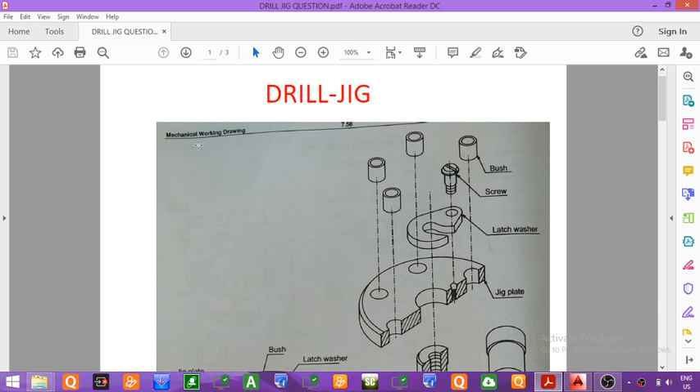Going to start with the detailed drawing or the disassembly of a drill jig. Now we will see what is a drill jig. Now this is the question of a drill jig. You can see this is the pictorial view of assembly of drill jig.

Now a jig is a device which is used to hold a workpiece as well as to guide the cutting tool to perform different operations on a workpiece. So here the drill jig is used to locate the workpiece or to hold the workpiece on which the drilling operation has to be performed, as well as to guide the drill in order to make the holes inside the workpiece. Now you can see these holes which are provided here on the jig plate.

This part is the jig plate. The holes are provided on the jig plate. So these holes will be used to guide the drill tool. So the drill tool will pass through these holes, and the workpiece which will be located below this plate, that is below the jig plate, on which we will perform the drilling operations. So basically drill jig is used to hold the workpiece in a proper location as well as to guide the drill tool in order to make the holes on the workpiece.

Now we will see the different parts of the drill jig assembly. So the different parts are: the first part at the bottom is the base plate. The second part, that is the vertical cylindrical part, here is the stem. Now the base plate and the stem are locked with each other using the locking screw or the cap screw. So this is the cap screw. So the cap screw will be used to lock the stem with the base.

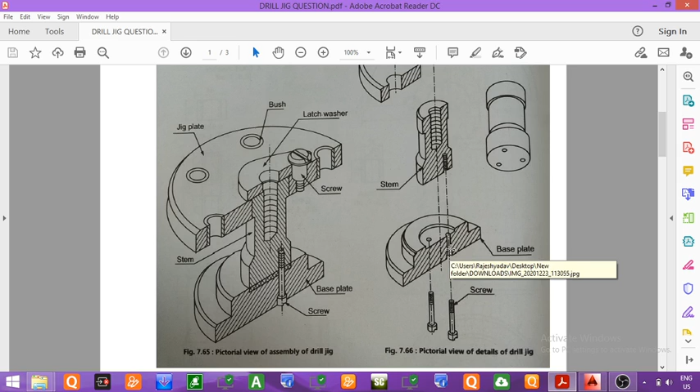Now you can see here the individual drawing of each and every part is given. So here there is a cap screw. This is the cap screw which is used to lock the stem with the base plate. This is the base plate. Now the base plate is having holes with threading present inside it. Now these holes are provided so that this cap screw can pass through them.

And finally, when the cap screw is inserted through this hole, the cap of the screw will rest at the bottom, whereas the threaded part will pass through this hole. Some part of the screw will go inside the stem. You can see threading is provided inside the hole which is present inside the stem. So some part of the screw will go inside the stem, and finally the stem will get locked with the base plate.

Now these holes are present in three quantity or three numbers. You can see at the bottom, this is the entire view, whereas the sectional front view, we have taken half section. So this is the sectional front view of the stem, whereas this is the entire view of the part. Now this part is having three holes at the bottom.

You can see first hole, second hole, and third hole. These three holes are provided at the bottom of the stem, and similar holes will be provided at the top portion of the base plate, inside this slot. This slot will also have three holes, and the diameter of this hole and that hole will be the same, so that when we insert these screws through the base plate, they will get locked by passing through the base plate and into the stem. So they will lock the stem with the base plate.

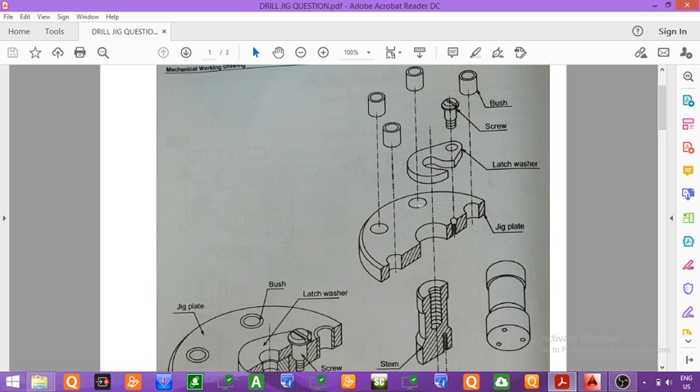Now this is the jig plate. The jig plate is having holes inside it. You can see first hole, second hole, third hole, and fourth hole. The total number of holes present is 6, but since we have taken the half section, here we can see only 4 holes. There is also a hole at the center, provided so that we can insert the stem through this hole. Inside these holes we will insert the bushes. These are the bushes, which will be inserted inside the holes present inside the jig plate.

After inserting this stem through this hole, we will lock the stem with the jig plate using the latch washer. This washer is used to lock the jig plate as well as the stem. When this part gets inserted here, we will lock this part and this part using the screw and the latch washer, as well as a nut that is provided. After inserting the stud here, we will lock the latch washer, the jig plate and the stem.

So these were the assembly and detailed drawings. This is the detailed drawing of each and every part, or the detailed 3D view of each and every part of the drill jig, and this was the assembled 3D view of each and every part.

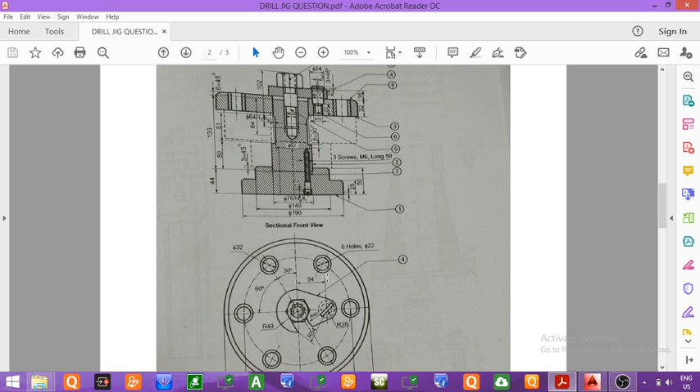Now we will see the assembly drawing of the drill jig. You can see here the top view. If you see the top view, it is mostly circles. Majority of the figures in the top view are in the form of circles, so we can conclude that these parts shown in the front view are cylindrical in nature. Each and every part will be cylindrical, that is, if we observe these parts from the top view, they will be observed as circles.

Now you can see the total number of holes, that is these holes which were present inside the jig plate, is equal to 6. You can count here 1, 2, 3, 4, 5 and 6. So the total number of holes present inside the jig plate is equal to 6.

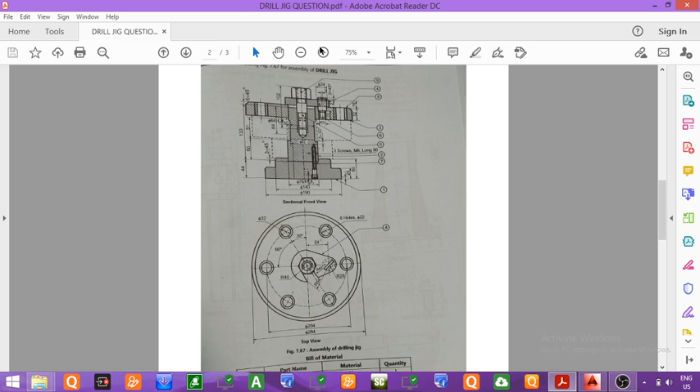Now we will see here the assembly diagram of the drill jig. You can see part number 1. Here the part list is given. Part number 1 is the base plate, material is cast iron, quantity is 1. Part number 2 is the locating peg, material is mild steel, quantity is 1. So here different parts used in the assembly, along with their material and quantity, are given.

You can see here the bushes which were present inside the jig plate, or which will be inserted inside the hole of the jig plate, are made up of CS, and the quantity is 6. So we can conclude that 6 holes are present inside the jig plate, and there will be 6 bushes which will be inserted inside this jig plate.

This is the top view of the latch washer. This is the top view of the bushes, the circles representing the top view of the holes as well as the bush. Then this is the top view of the latch washer. Then this is the top view of the hexagonal nut which will be used to lock the stem with the jig plate. Then this is the top view of the screw, the locking screw. The circles are nothing but the top view of the jig plate.

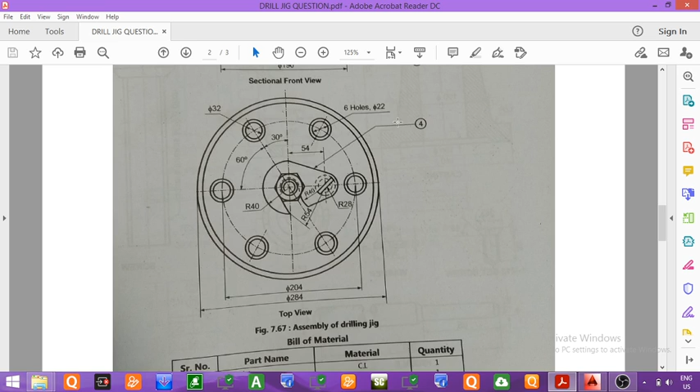Now we will here see the front view. So part number 1, part number 2 - each and every part has been named. You have to study the question carefully.

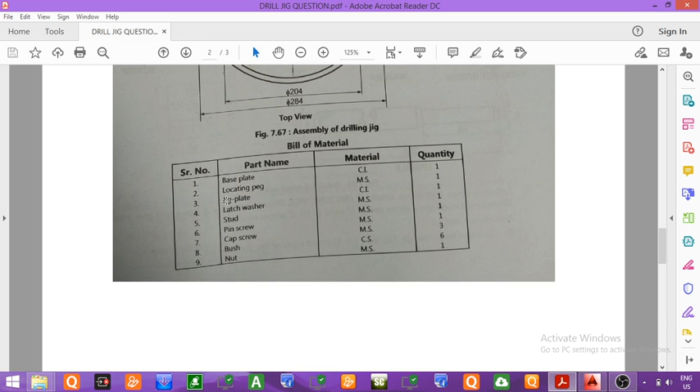In the exam, they may ask you to draw the front view and top view of a few selected parts, such as the base plate, locating peg, or jig plate. First, we have to locate these parts appropriately in the drawing. You can see the arrow pointing to the first part, and that first part is the base plate.

Here the entire sectional front view of the drill jig has been given. Now we have to disassemble each part, separate them, and draw the sectional front view and top view of each part with dimensions. So we will draw the first part, the base plate, whose quantity is 1.

In order to draw the base plate, first we need to identify its dimensions. You can see the outer diameter of this base plate is equal to 190. Since the dimension is given as diameter, this indicates that the part is cylindrical in nature, so the outer or largest diameter is equal to 190.

The diameter of this part from here to here is equal to 140. Whereas the diameter of the hole provided inside the base plate, where the stem will be inserted, is equal to 76. So the three diameters identified are: the largest diameter of the base equal to 190mm, the diameter of the upper part equal to 140mm, and the diameter of the hole for the stem equal to 76mm.

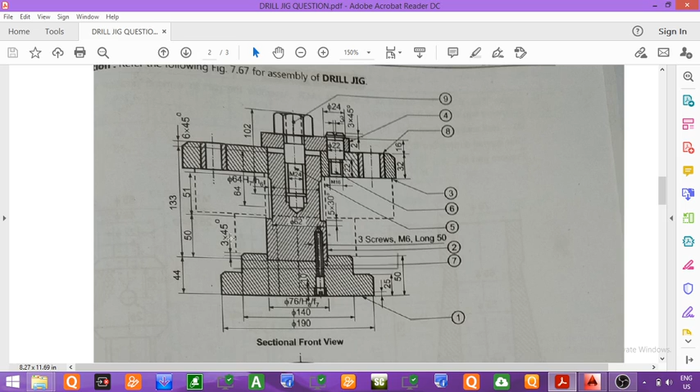Now you can see that at these corners, the sharp edges have been removed by using a fillet or chamfer. Chamfers are provided in order to eliminate sharp corners or sharp edges. The dimension of this chamfer is given as 3 into 45 degrees, meaning the height of the chamfer is 3 and the inclination of the chamfer line is 45 degrees.

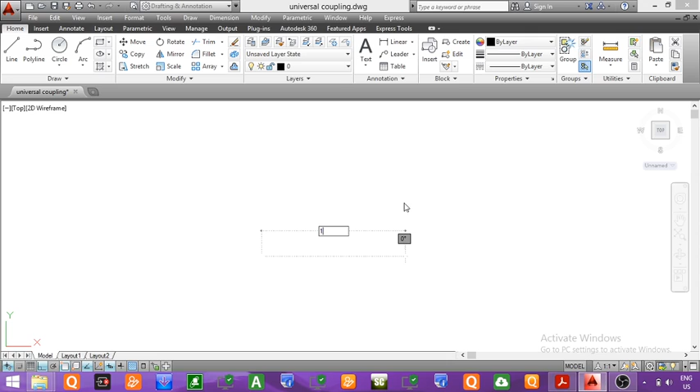Now we will draw the front view and top view of this base plate. First we will draw a line. The outer diameter given in the question, the major diameter, was equal to 190mm. So first we will draw a line of length 190mm. I am drawing this line, which will be of length 190mm.

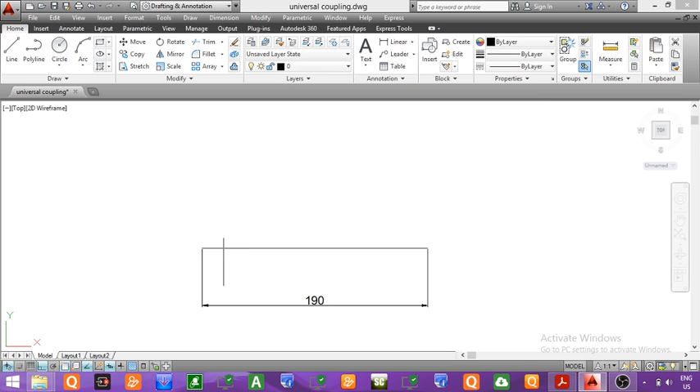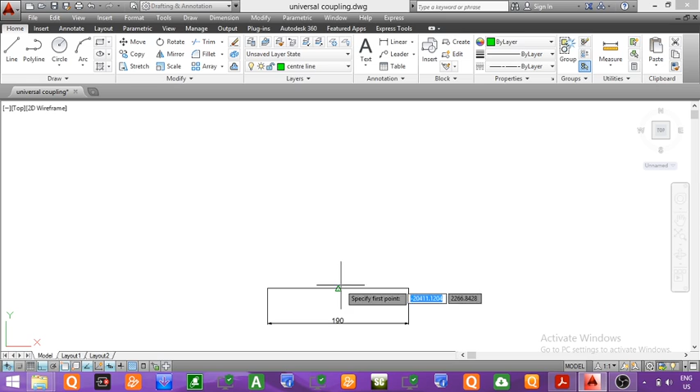So we have drawn first a line of length 190 mm. This line represents the base, which is equal to diameter 190 mm. Now in the next step we will mark the center of this part. So first we will draw the center line. The center line will be passing through the center of this line. So this is the center midpoint. You can see this is the midpoint. Now from this midpoint I will draw the vertical center line.

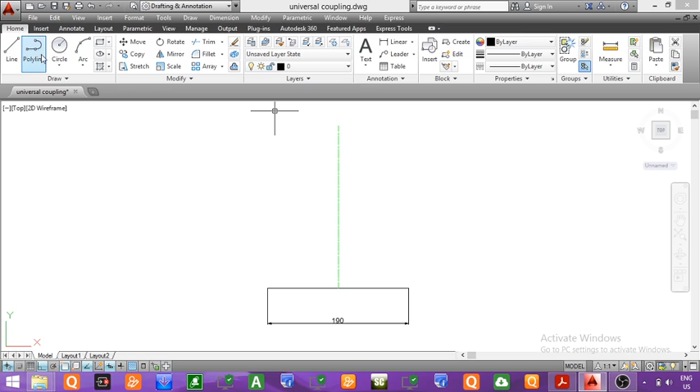Now in the next step we have to draw this vertical line. This vertical line will be of length 25 mm. You can see the length is 25 mm. So now we will draw a straight vertical line from the left end as well as from the right end, which will be of length 25 mm. So from this point we will draw a vertical line of length 25 mm. Similarly from the right hand side we will draw a vertical line of length 25 mm.

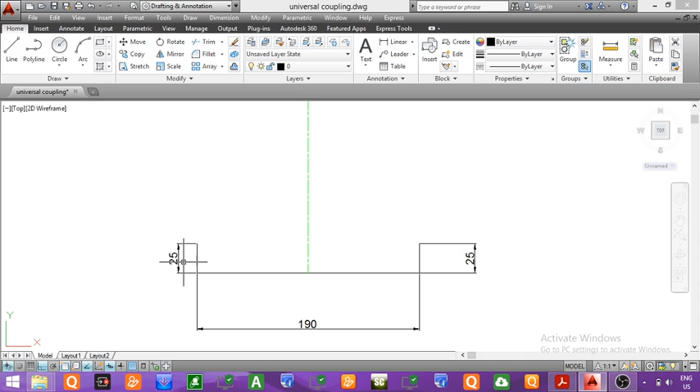Now we will give the dimension. So you can see the length is equal to 25. Again here the length will be equal to 25 mm. So you can see the length of the line on the left hand side as well as on the right hand side is equal to 25 mm.

Now in the next step we have to draw this line. Till now we have drawn the vertical line of length 25 mm. Now we have to draw this horizontal line, and we have to find the dimension of this horizontal line. Now how can we find the dimension? You can see the total outer diameter is equal to 190, whereas the diameter of this portion from this point to this point is equal to 140. So the difference of 190 and 140 will be equal to 50 mm. So now this 50 has to be divided by 2 because we have the line on the left hand side and on the right hand side also.

So first we will take the difference of this outer diameter 190 and the diameter of the portion from here to here, which is equal to 140. So the difference will be equal to 50 mm. Now we will divide this 50 mm by 2, so we will get 25 mm. So the length of this line will be equal to 25 mm. So now we will draw a line of length 25 mm from here. Similarly, again we will draw a line of length 25 mm from this point.

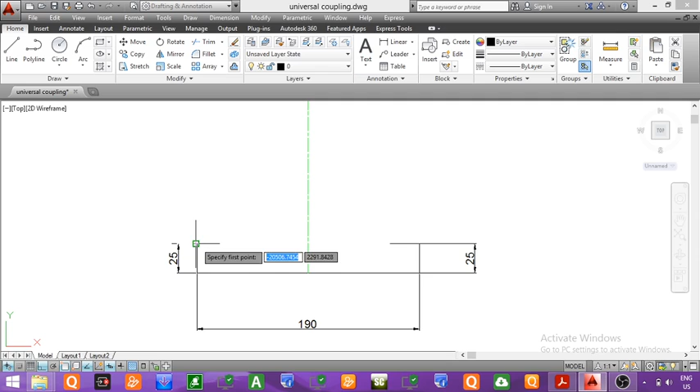Now I will give the dimension here. So you can see the dimension is 25 mm. So you have to draw a line of length 25 mm both on the left hand side as well as on the right hand side. Now we will give the dimension here. So you can see this is 25 and this is 25.

Now in the next step we have to draw this vertical line. This vertical line will be of height 25 mm. The total height is 50 mm and this is also 25 mm. So the difference will be equal to 50 minus 25, that is 25. So this line will be of height 25 mm. So now we will draw a vertical line of 25 mm from this point, 25 mm on the left hand side and 25 mm on the right hand side.

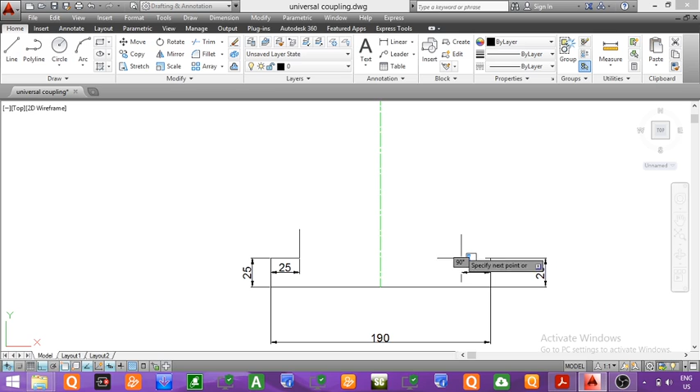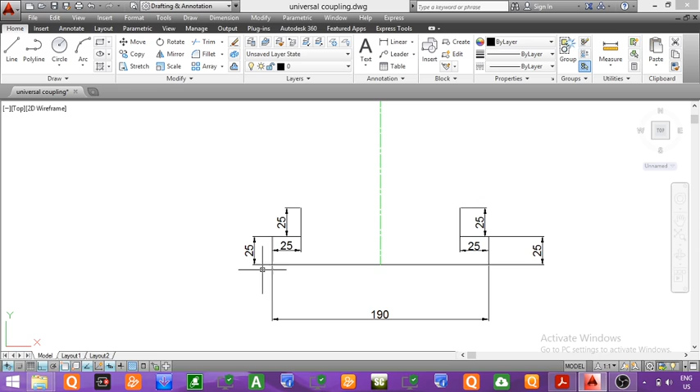So you can see we have drawn a line of 25 mm on the left hand side as well as the right hand side. Now we will give the dimension. So this is 25. You can see we have drawn a line of height 25 mm, and from this point we will again draw a line of height 25 mm. So first we have drawn a vertical line of 25 mm, then a horizontal line of length 25 mm, and then finally again a vertical line of height 25 mm. Now I am deleting this dimension. We can give it later on.

Now in the next step, we have to draw this horizontal line from here to here. So we have to find the dimension of this horizontal line which is on the left hand side, as well as the same horizontal line has to be drawn on the right hand side also. Now in order to find the dimension of this horizontal line, we have to look at the dimensions first. The total dimension from here to here is equal to 140 mm, whereas the dimension of the hole which is present inside the base plate at the top, that is this hole, is equal to 76 mm.

So the diameter from here to here is equal to 140 mm, whereas the diameter of this hole is equal to 76 mm. So we will first find the difference. The difference will be equal to 140 minus 76, that is equal to 64. Now we have to divide that 64 by 2. So 64 divided by 2 will be equal to 32. So the dimension of this line will be equal to 32, as well as the dimension of this line will be equal to 32 mm.

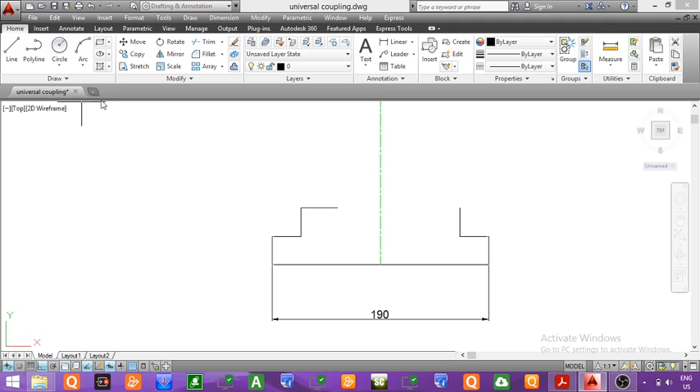So now we will draw two horizontal lines of length 32 mm both on left hand side as well as right hand side. 32. Again we will draw a line from this point which will be of dimension 32 mm. Now we will give the dimension. So this line is of length 32 mm. Again this line is of length 32 mm. So you can see we have drawn a line of length 32 mm both on left hand side and right hand side. Now we will draw the hole which is present here.

Now in order to draw the hole, we will find the dimension of the hole. The height of this hole will be equal to 6 mm. As said earlier, the height of the hole is found out by: the total height of the base plate is equal to 50, whereas the height from this line up till this point, that is where the hole begins, is equal to 44. So the difference will be equal to 50 minus 44, that is 6 mm. So the height of the hole which is present inside the base plate will be equal to 50 minus 44 equal to 6 mm.

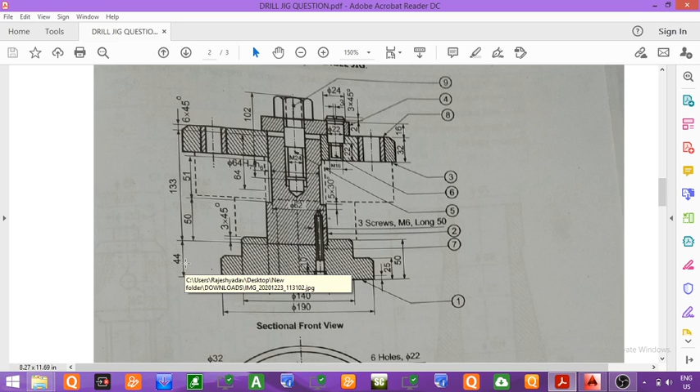So now we will mark the height of the hole which will be equal to 6 mm. You can see we are marking the height 6 mm. Again we will mark the height on the right hand side which will equal 6 mm. Now we will give the dimension so that you can understand. The height of this hole is equal to 6 mm. You can see the height of the hole is equal to 6 mm. Similarly, here also the dimension will be equal to 6 mm. So we have marked the hole which is of dimension 6 mm.

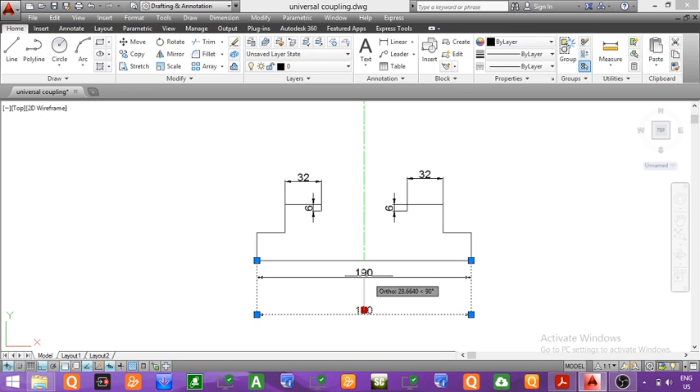Now I am deleting this dimension. We can give it later on. Finally, now we will join these 2 points to represent the hole. So we are joining the first point with the second point. So you can see we have completed some part of the front view of the base plate. Now if we want to give dimensions, we can give it later on.

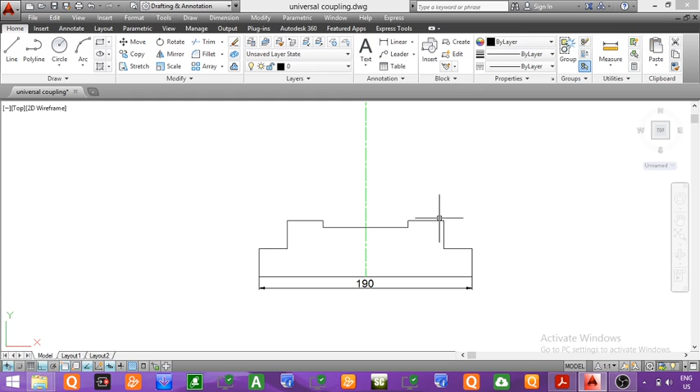Now in the next step, we have to show the chamfering which is done at this corner. See, these are the corners which are formed. Now we have to eliminate these corners, and these corners are eliminated by doing chamfering. So now we will provide the chamfering. In order to provide the chamfering, we have to first see the dimension of the chamfer. The dimension of the chamfer is given as 3 into 45. So now we will provide the chamfer. So we are providing the chamfer.

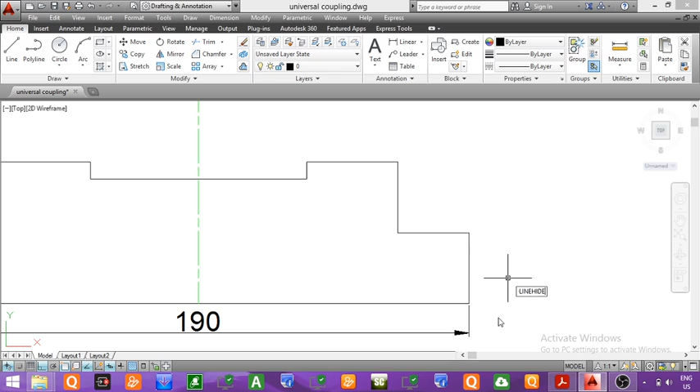So you can see we have provided this chamfer. Now this chamfer will have a vertical height equal to 3 mm and the angle will be equal to 45 degree. Now I will give you a dimension of this chamfer. The height of this chamfer will be equal to 3 mm. You can see the height, that is from this point to this point, the vertical height will be equal to 3 mm, whereas the angle of the chamfer will be equal to 45 degree.

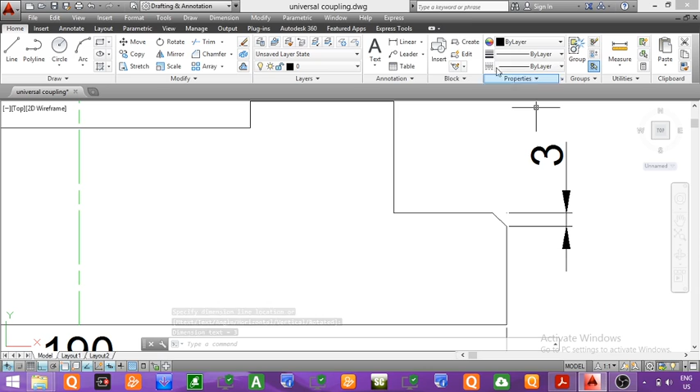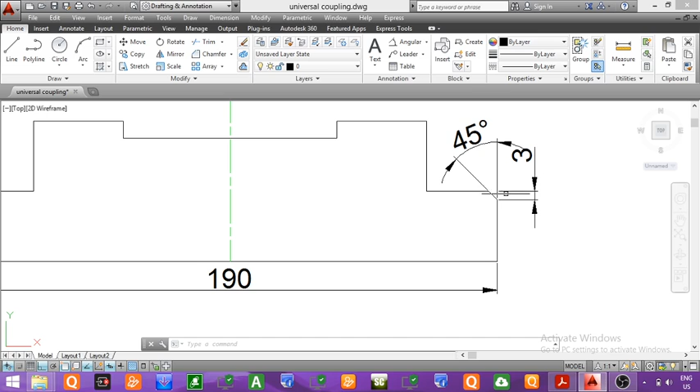Now I will show the angle also. Now you can see the angle is equal to 45 degree. So at this corner you have to draw a chamfer line or inclined line to show the chamfering, and this inclined line will be drawn at a vertical height of 3 mm and at an angle of 45 degree. So from the corner you have to mark a height of 3 mm in the vertical downward direction, and from this point you have to take an angle of 45 degree. So the chamfer will have a vertical height of 3 mm and a chamfer angle of 45 degree. Similarly, now we will show the chamfer here also.

So we have given a chamfer on the left hand side also. Similarly, we will do the chamfering on the top corner on the left hand side as well as the top corner on the right hand side. So again, we will select the first vertical line. Now we are providing a chamfer. So we have provided the chamfer here also at this corner, and now we will provide the chamfering at the right corner on the top side.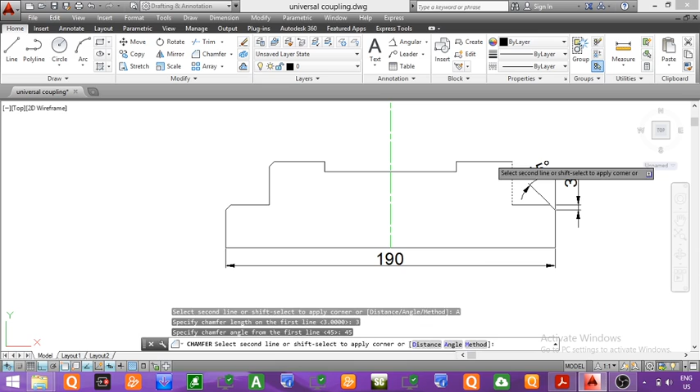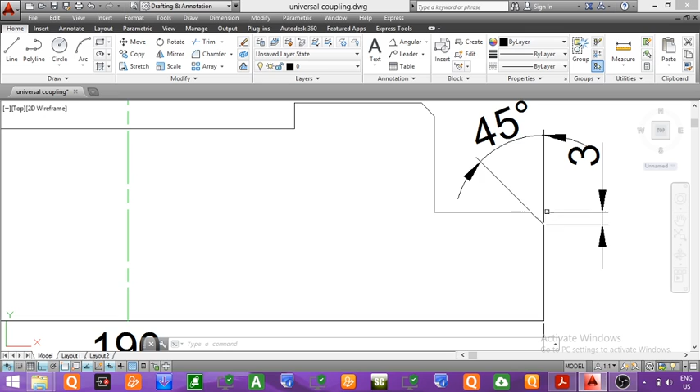So again, we will select the first vertical line. This is my first vertical line. Then, so you can see here we have provided the chamfering. So all the corners have been chamfered and the dimension will be 3 into 45. That is, this line will be inclined with the vertical. This is a vertical line. So this inclined line will have an inclination of 45 degree with this vertical line, whereas the height will be equal to 3 mm. So finally we have shown the chamfering at all corners.

Now in the next step we have to show this hole. Now you can see the base plate is having a hole for inserting the cap screws. This is the cap screw. The base plate will have a hole for inserting the cap screw, and the total number of holes present inside the base plate will be equal to 3. Now you can see from this question that this is the stem and this is the base plate. The stem is to be locked with the base plate. So for locking, we insert these cap screws through this hole.

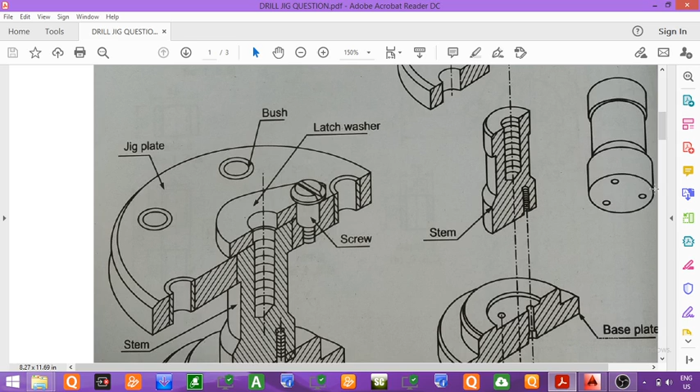Now you can see at this bottom portion of the stem, there are 3 holes which will be placed at an angle of 60 degree with respect to each other. So we can say that if 3 holes are present at the base of the stem, then similar 3 holes will be present inside the hole of the base plate also. That is, 3 holes will be present in this slot also. So we have to show these holes in the front view as well as top view.

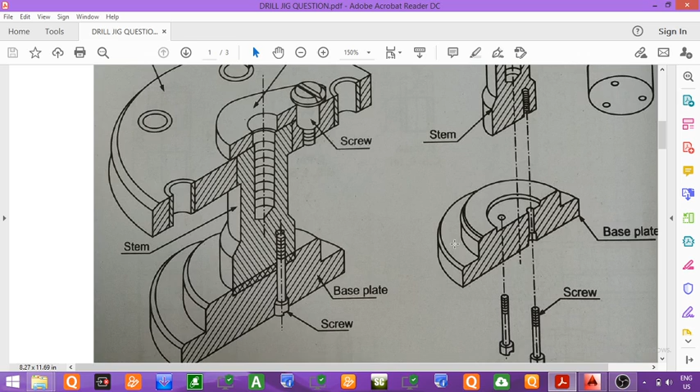Now you can see, when we cut the base plate from the center, that is when we take the sectional view, only this hole is being cut. That is, this hole as well as the hole which is present in front will not be cut by the section plane. So only this hole at the center of the base plate will be cut by the section plane. So we have to show this hole only in the front view, whereas in the top view we have to show all these 3 holes. Now we will show this hole, that is the hole provided for inserting the screw inside the base plate, in the front view.

Now in order to show this hole here, first we have to mark the center of the hole. We have to locate the center of the hole. So in order to locate the center, we will see the question. Now you can see here the center distance, that is from the center of the drill jig assembly to here, is not given. So the center distance from the center of the drill jig assembly to the center of the cap screw or the hole is not given.

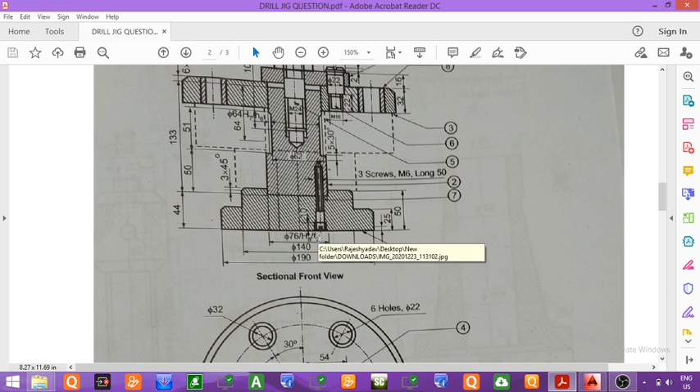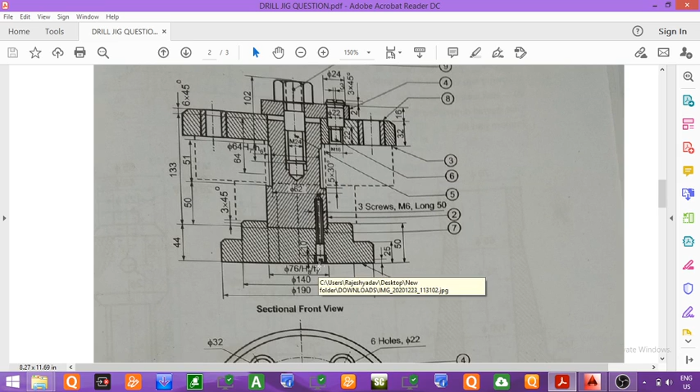Now we will try to identify if this center to center distance is given in the top view. So if we see, this is the center of the assembly in the top view, and this center line, if projected here, is not shown anywhere. So the distance from this center to this center is not given in the front view, and it is not given in the top view also. So this part is missing in the question, so we have to assume a suitable data. So if in the exam also the center to center distance is not given in the front view, then we will check if this distance is given in the top view. If the distance is not given in the top view also, then we will assume a suitable distance.

So this distance we are assuming as 50 mm, so the total center to center distance will be equal to 50 mm. So the half distance, from here to here, will be equal to 25 mm. So here we will be assuming that the distance from the center line of the assembly to the center of the hole will be equal to 25 mm. So we are assuming a distance of 25 mm between two centers.

So now we will draw the center line which will be at a distance of 25 mm. From here we have to mark a distance of 25 mm, and then we will mark the center again. So this is the second center line, which will be at a distance of 25 mm. Now we will give here a dimension, so the dimension from here to here is equal to 25 mm, from this point to this point.

So you can see the center to center distance, this is the center of the hole through which the cap screw will be inserted, and this center is at a distance of 25 mm from the center of the base plate. So if in the exam the data is not given, you have to assume a suitable data. So we have assumed the center to center distance as 25 mm.

Now we have to draw the hole here. So in order to draw the hole, first we will see the dimensions of the hole. Now you can see here the cap screw, when the screw will be inserted, the head of the screw will fit inside this hole. So this is the hole which is provided for inserting the head of the screw, where this hole is provided for the shank or the lower part of the screw. So this hole is nothing but the hole for the head of the screw.

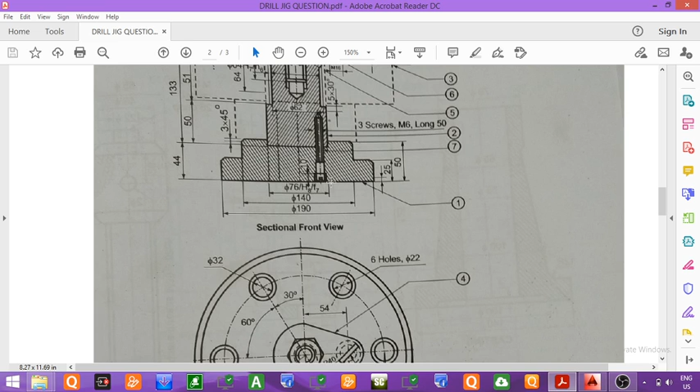So now we will draw first the front view of the head. So from this point we have to take 5 mm towards right, and then we will mark the height. Height is equal to 10 mm.

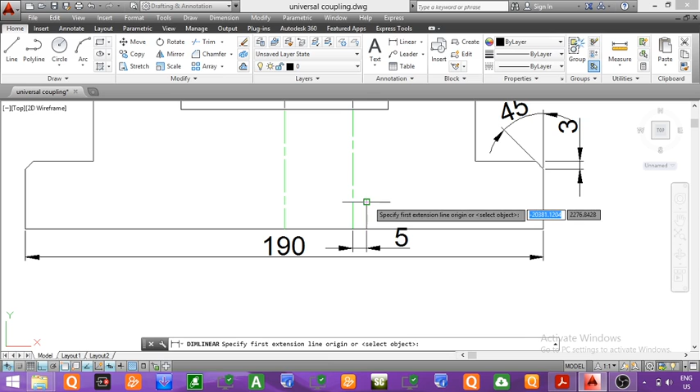Now you can see I will give the dimensions. This distance will be equal to 5 mm, whereas this height will be equal to 10 mm. The height of the screw head is equal to 10 mm, so we have marked the height 10 mm, whereas the diameter of the screw head will be equal to 10 mm, so we have to mark the distance of 5 mm towards left and 5 mm towards right also.

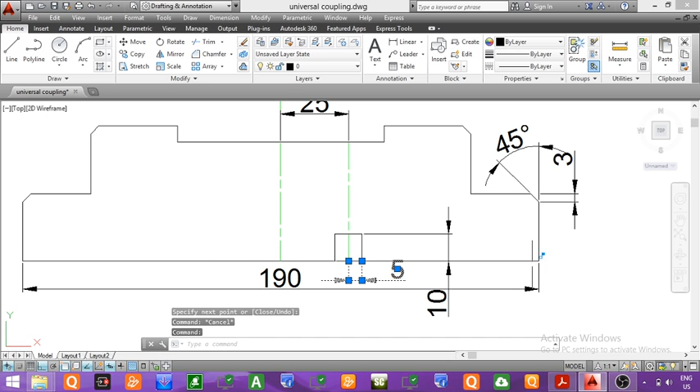Now we will draw the hole. We will take a distance from here equal to 10, and then we'll complete the hole. Now I will give the dimension here. This diameter of the head will be equal to 10 mm.

So you can see this is the hole provided for resting the head of the screw, and this hole will have a height of 10 mm. So the height of the hole is equal to 10 mm and the diameter of the hole is equal to 10 mm. So from this center you have to mark a distance of 5 mm towards left and 5 mm towards right, and then draw two vertical lines of height 10 mm. So finally we have completed the hole for the head of the screw.

Now we will complete the hole which is provided for the lower part of the screw, that is the shank of the screw. The major diameter was given as 6 mm, so if the diameter is equal to 6 mm, the radius will be equal to 3 mm. So from this center we will take a distance of 3 mm towards left, and then we will draw a vertical line till here.

Similarly, from this center we will take a distance of 3 mm towards right, and then we will draw a vertical line till here. So you can see now we have drawn the hole for the lower part of the cap screw.

Now we will see the dimension. The diameter was given as M6, so the major diameter is equal to 6 mm. So you can see the diameter of this part, or the lower part of the hole, will be equal to 6 mm, since in the question it was given M6.

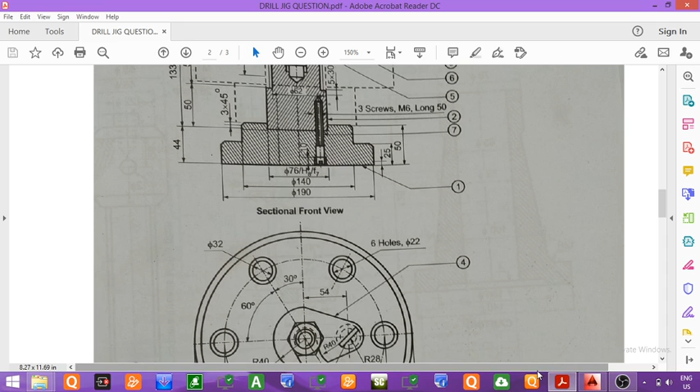Now we have to show the internal threading also. So before showing the internal threading, we will see in which part it is present. You can see this hole does not have threading in the entire portion. From here, this hole is provided for inserting the head, so the head will not have any threading, and the portion from here to here, that is some suitable length of the screw, is also not having threading. So this portion is not having threading, whereas the upper part is having threading.

So we'll mark this. Now here the portion which is not having the threading, its height is not given, so we will assume some suitable height. You can assume this height as anything. Now that we have assumed a suitable height, this portion of the screw will not have threading present inside it, whereas this upper part will have threading.

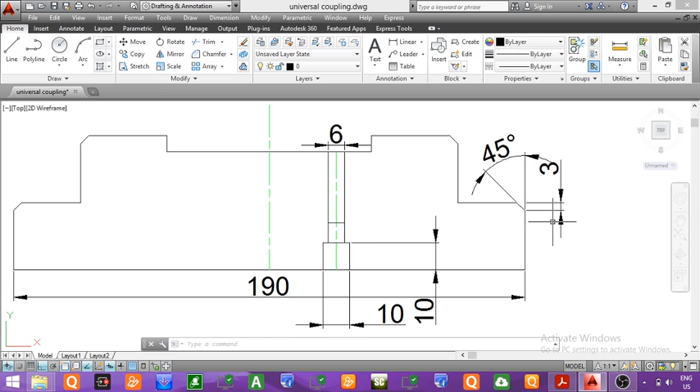So now we have to show threading in this upper part, that is from here to here. The major diameter of the thread was equal to 6 mm, so here we will assume the minor diameter as equal to 4 mm. So for showing the minor diameter line, we will take a distance of 2 mm towards left and draw a vertical line. Again from this center we will take a distance of 2 mm towards right and draw a vertical line. So you can see here we have drawn the threading inside the hole.

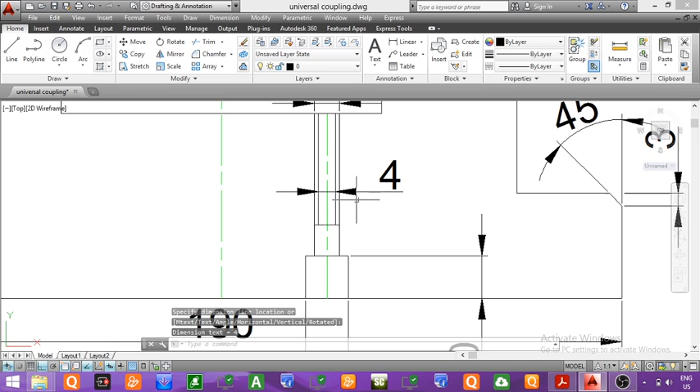Now the major diameter of the thread is equal to 6 mm, whereas if we want to show the minor diameter, we can see here the minor diameter is equal to 4 mm. So the major diameter of the thread is equal to 6 mm, whereas the minor diameter is equal to 4 mm. For this portion you have to assume a suitable height.

So here we have assumed a height, you can see, it is 7.5. Now you can see this height, that is the height in which no threading is present, is equal to 7.5. So here you can assume any height, you can assume 8 mm also, since this dimension or the height of the hole in which there is no threading is not given. So here you can assume 8 mm also.

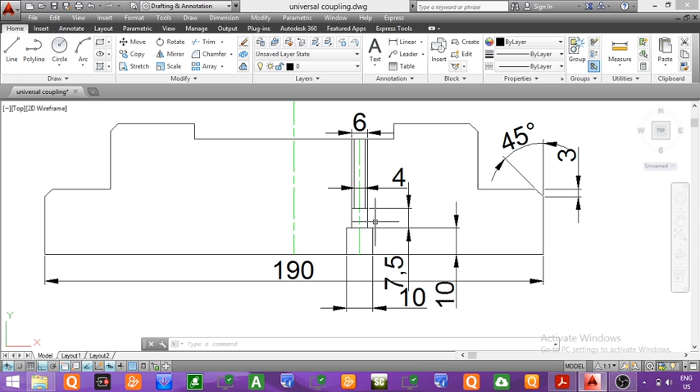For this case we have taken it as 7.5 mm. So finally we have completed the front view of the base plate, the sectional front view of the base plate. Now we have to show the section lines. I'm deleting some dimensions, we can give them later on.

Major diameter of the thread is equal to 6 mm and the minor diameter of the thread is equal to 4 mm.

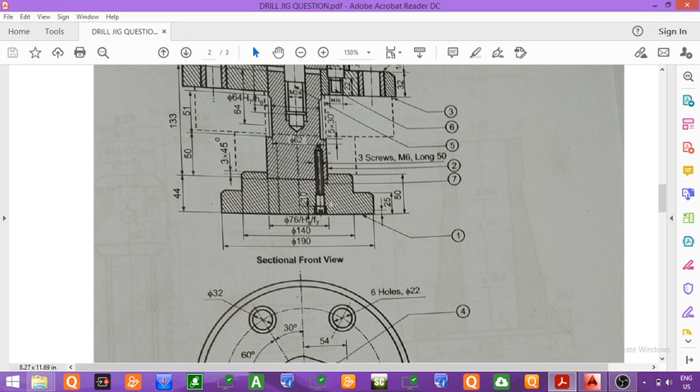Now this entire portion of the base plate is a solid part. You can see from this figure, section line has been shown in this entire part of the base plate except the center, because a hole was present here. So this part of the base plate present here is not a solid part. We have to show the section line inside the solid parts. So this is a solid part, this is a solid part, this is a solid part. Finally we have shown the section line inside the solid parts.

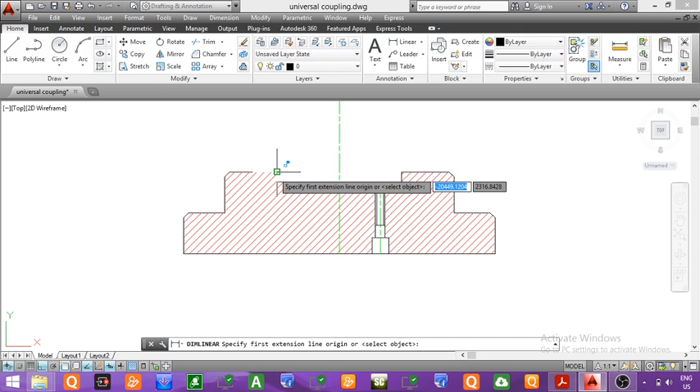Now we can give the dimensions here one by one. I will insert the symbol phi, so phi 76. Now we will give the dimension of this part. This is equal to 140 as given in the question, 140. And the diameter of the largest part from here to here will give here.

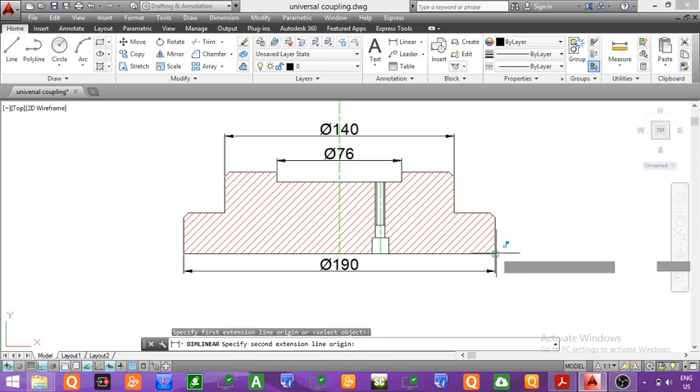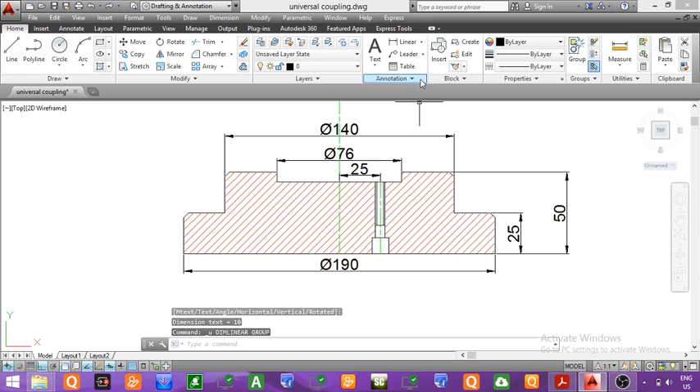This diameter is equal to 190 mm. Now we will mark the height of the entire part. The height from here to here is equal to 50 mm, whereas the height of this portion from here to here is equal to 25 mm. This height from here to here is equal to 25 mm. We will give the center distance also. Distance from here to this center is equal to 25 mm. Now we will give the dimension of the diameter of the head. The diameter of the head is equal to 10 mm. You can see the diameter of this head is equal to 10 mm.

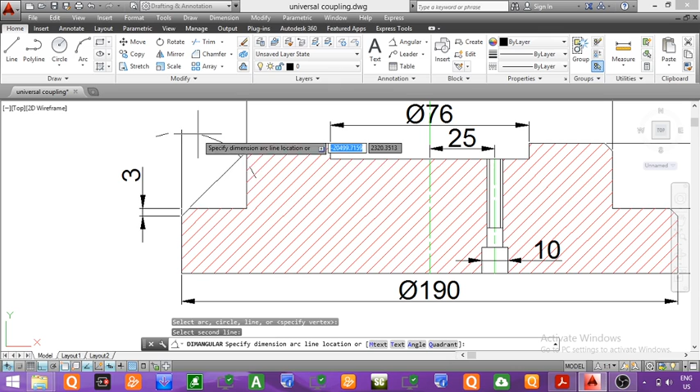Now we will give the dimension of these chamfers. This chamfer is of height 3 mm, whereas the chamfer angle is equal to 45 degree. This chamfer angle is equal to 45 degree. So we have given the majority of the dimensions. The chamfer is of dimensions 3 into 45, so 3 will be the vertical height and 45 is the chamfer angle. We have given the diameters, and we have mentioned the center to center distance, that is 25. We have given the diameter of this part, that is 10 mm.

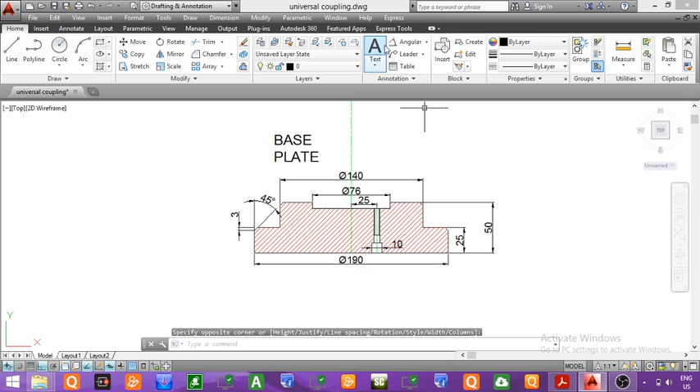Now we will draw the top view of this base plate. So this is the base plate. Now I am writing here the name of the part, the base plate. We have drawn the base plate. This was the front view of the base plate, so we will mention here the sectional front view. We have completed the sectional front view of the base plate.

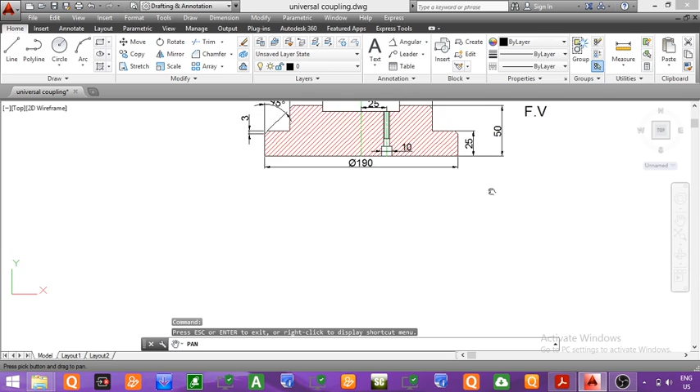Now we will draw the top view of the base plate. Since this is a cylindrical part, the top view will be circle. In order to draw the circle, first we have to mark the centers of the circles. We will draw the vertical center line, and then the horizontal center line. So we have drawn two center lines, a vertical center line and a horizontal center line. The top view of this part will be circles, since this is a cylindrical part.

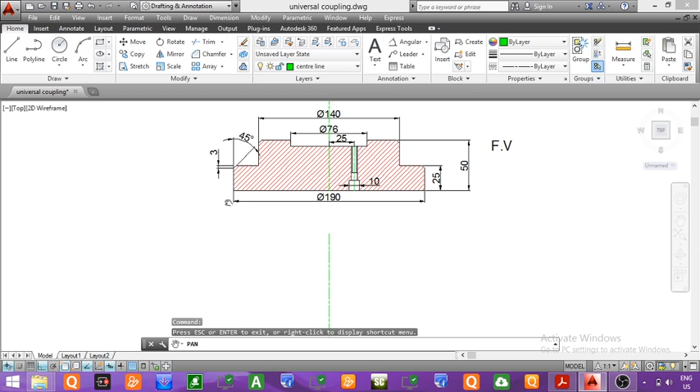Now the largest circle will be of diameter 190 mm. This outer part is of diameter 190 mm. If we observe this figure from the top, we can easily see this largest diameter, that is 190 mm. So the largest circle that we draw in the top view will be of diameter 190 mm. Now we will draw here the circle of diameter 190 mm.

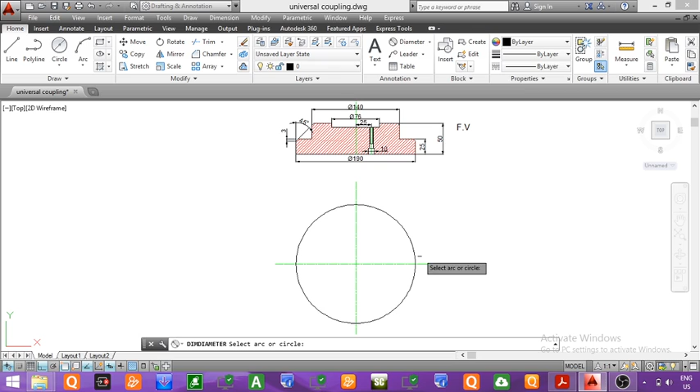This circle which we have drawn here is of diameter 190 mm. That is the top view of this portion. If we want, we can give the dimension here also, and later we can delete it. You can see the diameter of this circle is equal to 190 mm.

Now the second circle that will be visible from the top view will be a circle of diameter 140 mm. This cylindrical part from this vertical line to this vertical line is of diameter 140 mm. So if we observe this cylindrical part from the top view, we have to draw a circle of diameter 140 mm, so we have drawn it.

We can give the dimension here also, and you can see the diameter of this circle is equal to 140 mm. Now in the next step, we have to draw the top view of this circular hole, which will be visible when observed from the top view.

You can see here the circular hole which is of diameter 76 mm. This hole, when observed from the top, will be visible, so here we have to draw a circle of diameter 76 mm. Now if we give a dimension, you can see this diameter will be equal to 76 mm.

So the outer circle is of diameter 190 mm, the second circle of diameter 140 mm is drawn here, and the third circle, which is the top view of this hole of diameter 76 mm, is drawn here. So we have drawn three circles for the top view of the parts. Now I am deleting this dimension, since these dimensions were already given in the front view, we don't need to give the dimension again in the top view.

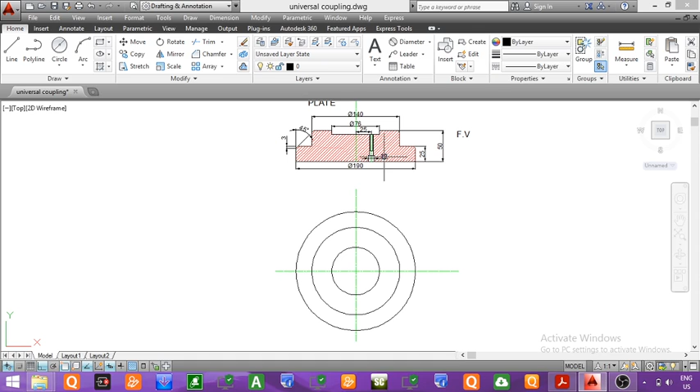Now if you observe, this corner has been removed by doing a chamfering. So we can say that one circle will be of diameter 190 mm ending here, and due to chamfering, another circle can be observed from the top view because chamfering has been done here. So this corner, the total distance from this corner to this corner, if observed from the top view, will be observed as a circle.

So we have to draw two circles in the top view, one to represent this corner point, and the other to represent the other corner point. Wherever chamfering has been done or a chamfer has been provided, we have to draw additional circles. The first circle, of diameter 190, has already been drawn. Now we will draw the circle for this corner, and similarly, since chamfering has been done again at the top, we will draw a circle for that corner too.

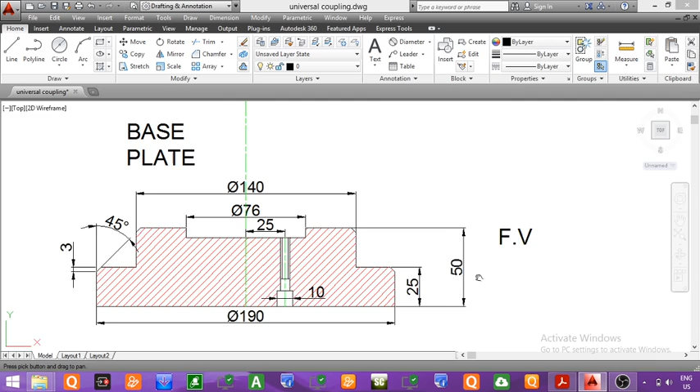Now in order to draw the circles for the two ends, we have to find the dimension of this end, that is the dimension from the center line to this point. Instead of finding a dimension, what we can do is directly project this point in the top view. Now I am projecting this point in the top view.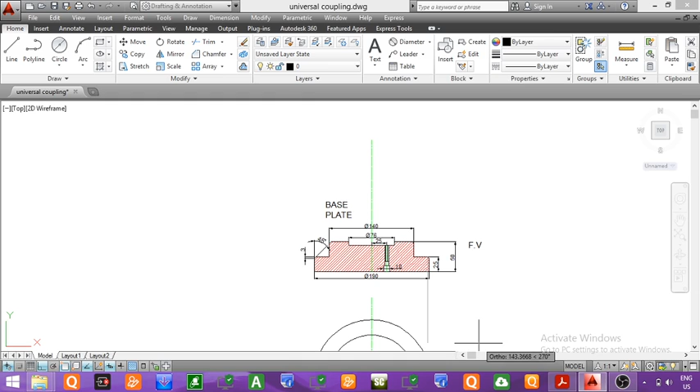So you can see what I have done, I have projected this end point. Okay, it is wrong, we will project this point instead, in the downward direction. So you can see we have projected the corner point.

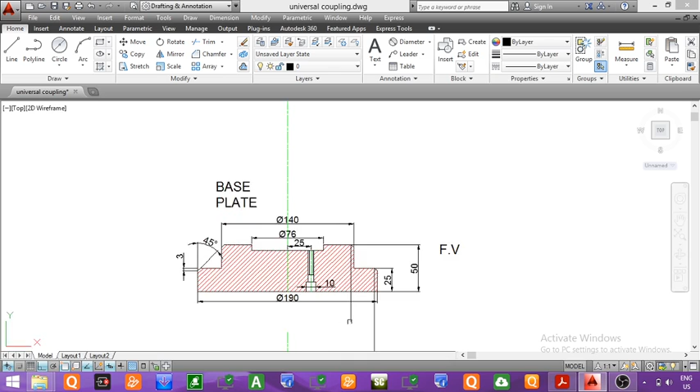Again, we will project the second point in the top view. So this is the second point that has been projected. You can see we have projected the ends of this chamfer line, this being the end of the first chamfer line, and this the end of the second chamfer line, so we have projected these two ends in the top view.

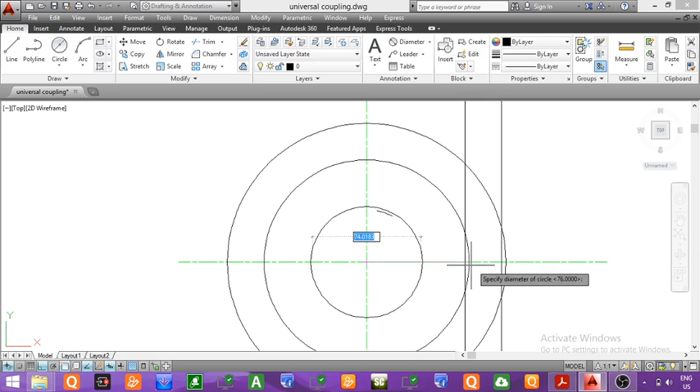Now we know the end of the first circle will be at this point, and the end of the second circle will be at this point, so we will draw circles directly. Taking this as the center and this point as the radius, we have drawn the first circle.

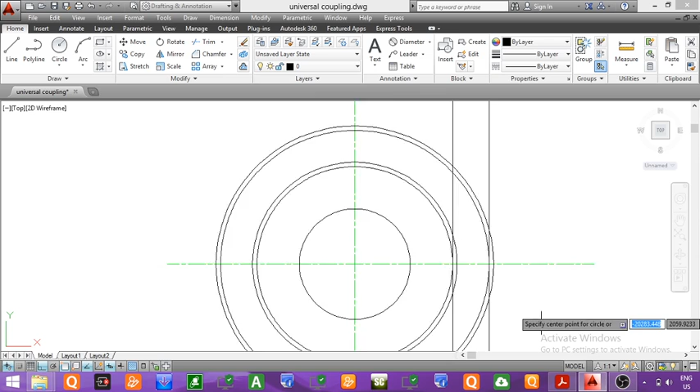Again, by taking this point as the center, and the second projected point as the radius, we have drawn two additional circles, one first and the second drawn here to represent the chamfer circles. Now we will delete these lines.

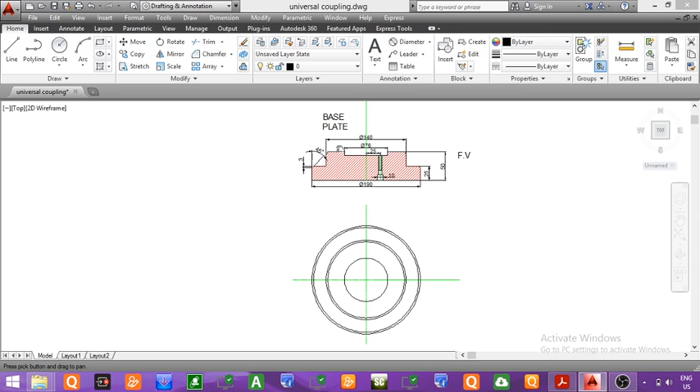So you can see here, in total we have drawn 5 circles. First circle was of diameter 190 mm, second circle was of diameter 140 mm, third circle was of diameter 76 mm. But two additional circles were drawn to show the chamfer circles.

Because after chamfering, if we observe these corners, that is this corner and this corner, from the top view we can see the chamfer circles. So two additional circles have been drawn to represent the chamfer circles.

Now in the next step, we have to show these holes, that is the internal threading as well as the hole which is provided for inserting the head of the screw. Now if we observe these holes from the top view, they will not be visible, because these holes are present inside the base plate, that is here internal threading has been performed. So these holes will not be visible from the top view.

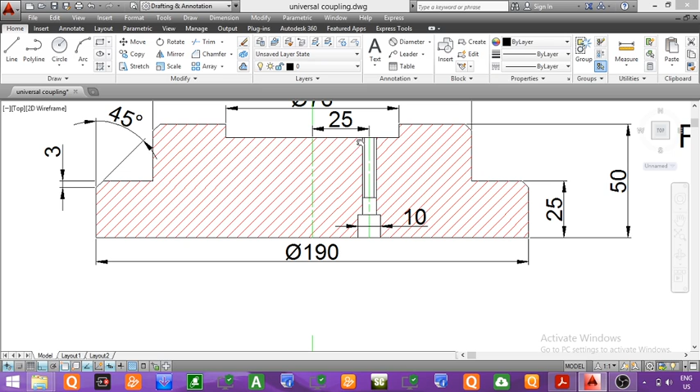So if we observe this hole from the top view, we can observe 3 circles. First circle, which will represent the minor diameter, will be of diameter 4 mm. The second circle will represent the major diameter, that is equal to 6 mm. So we have to draw two hidden circles, one for the major diameter, that is 6 mm, and one for the minor diameter, that is 4 mm, and the third circle which will be hidden, it will be of diameter 10 mm. So in short, we have to draw 3 circles in the top view that will be hidden.

Before drawing the circles, we have to first project this center line in the top view, that is this center line in the top view. So now we will draw the center line in the top view also. We will project this center line. You can see I am projecting here. So we will project till here.

So this is the center of this hole. So this hole which is having center here will have the center in the top view at this point. So I have projected this center line in the top view. So this will be the center of the circles. Now we have to draw here 3 circles which will be hidden.

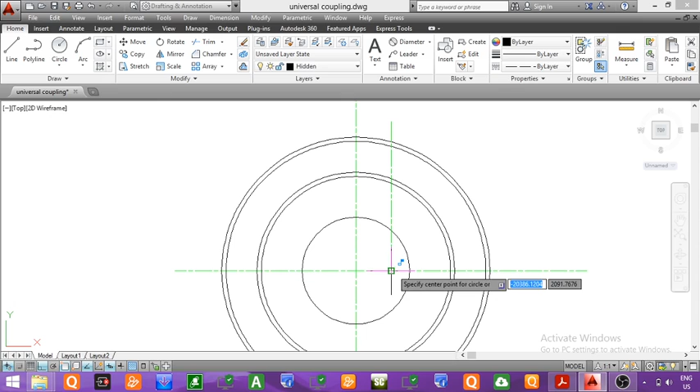So the first circle, which will be a hidden circle, will be of diameter, you can see here. Now we will draw the first circle which will be of diameter 10 mm. We will select here circle and diameter. So the first circle will be of diameter 10 mm. You can see I will give a diameter here. So this circle will represent the hole for the head of the screw, that is diameter 10 mm.

Now the second circle will be drawn to represent the major diameter of the thread, that is 6 mm. Now you can see if I give the dimension of this hole, it is 6 mm. And the third hole that will be drawn will represent the minor diameter of the threading, so it will be equal to 4 mm. Now we will give a dimension here. Now you can see this dimension is equal to 4 mm.

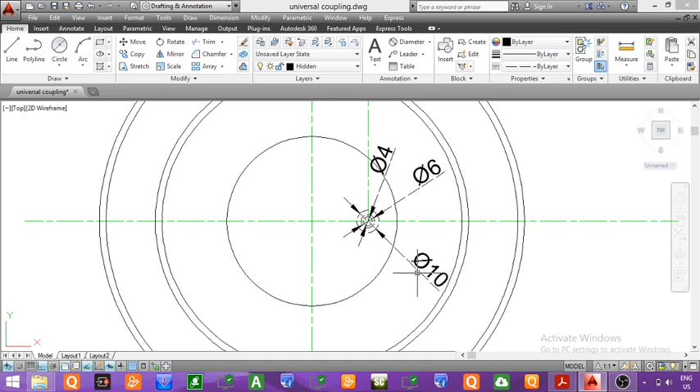So in all we have drawn three circles. One circle will be of diameter 10 mm and it will be a hidden circle, so we have to draw it with the help of dotted lines. The second circle will represent the major diameter of the thread, which will be of diameter 6 mm, again it will be a hidden circle. And the third circle will be of diameter 4 mm, which will represent the minor diameter of the threading. So in all we have to draw three circles in the top view with dimensions as 10 mm, 6 mm and 4 mm respectively.

Now I am deleting these dimensions.

Now the total number of holes which are present in the base plate will be equal to 3. Now you can see from this question, the stem is having total 3 holes at its bottom. So these 3 holes or similar 3 holes will be present here also. So in the base plate also we have to show 3 holes.

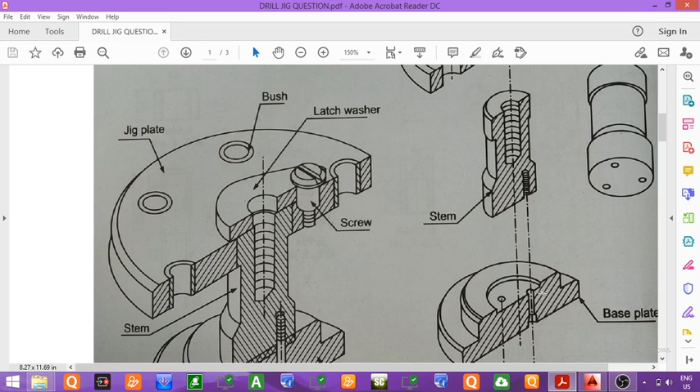So in the top view, if we observe this base plate from the top view, we can easily observe these 3 holes. So we have to draw the 3 holes in the top view also. Now till now we have drawn the top view only of the first hole, that is this hole which was visible in the front view. But in actual there are 3 holes present inside the base plate, and they will be present at an angle of 120° with respect to each other.

So now what we'll do, first we'll mark the center line of the other hole which will be at an angle of 120° from this line. So this is the center line of the first hole. Now we will mark the center line of the second hole. Now the center line of the second hole will be at an angle of 120° from the first. Now you can see I will mark first the center line.

Now you can see this is the center of the second hole and the total angular distance between these two lines will be equal to 120°. Now I will give you the dimension also so that you can understand. The total angle between these two lines will be equal to 120°. Okay, total angle should be 120°.

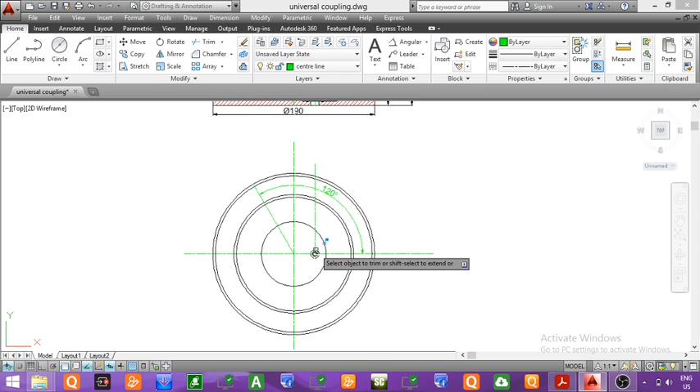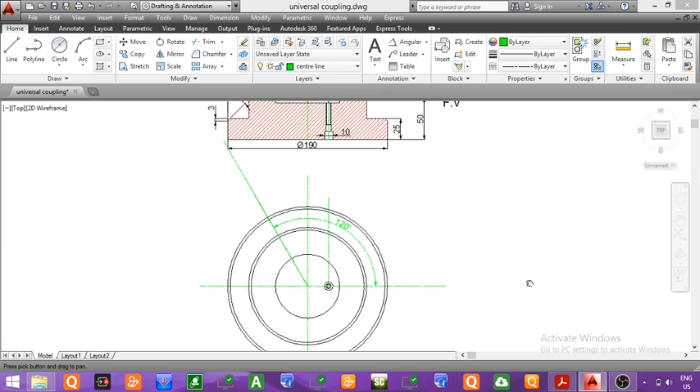this was the first center line at an angle of 120°. Now we will draw the second center line again, which will be at an angle of 120°. Okay. Now the second line should be also at an angle of 120 degree.

So you can see we have drawn the second center line. Now we will check the angle of the center line again. So from this line to this line we'll check the angle. So the angle is equal to 120 degree. And if we check the angle between these two lines, from first line and this is my second line, you can see the angle is equal to 120 degree.

So we have to draw three holes, and the center of the three holes will be inclined at 120 degree with respect to each other. This is the first center line, this is the second center line, and this is the third center line, and all the centers are at an angle of 120 degree from each other. Now we will draw the remaining two holes.

For drawing the holes, we have to first mark the pitch circle. So pitch circle is nothing but the circle passing through the center of the hole. So this is the hole, center of the hole. So we have drawn a pitch circle. Now this pitch circle is passing through the center of these holes. So again we have to draw similar holes taking this as a center, and then again the hole taking this point as the center point. So now we will draw the holes.

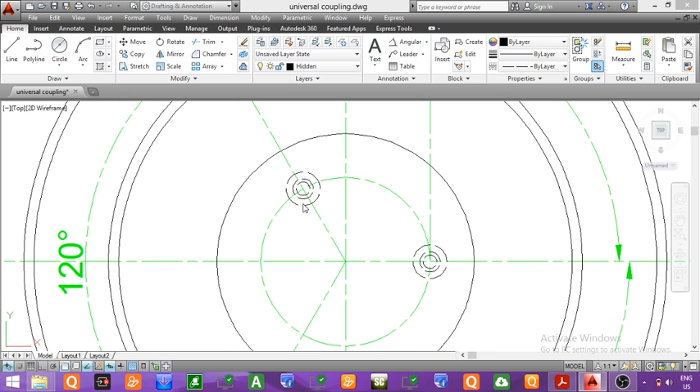Taking this as a center, first we will draw a circle, hidden circle. This will be a hidden circle of diameter 10 mm, first circle. Then again we will draw a circle to represent the major diameter. It will be of diameter 6 mm. And then again we will draw a third circle of diameter 4 mm to represent the minor diameter of the thread. So we have drawn three circles to represent the internal holes and threading.

Again, taking this point as center, we will draw the first hole which will be of diameter 10 mm. Then we will draw the second hole to represent the major diameter, that is 6 mm. And then again we will draw the third hole to represent the minor diameter of the thread, that will be equal to 4 mm.